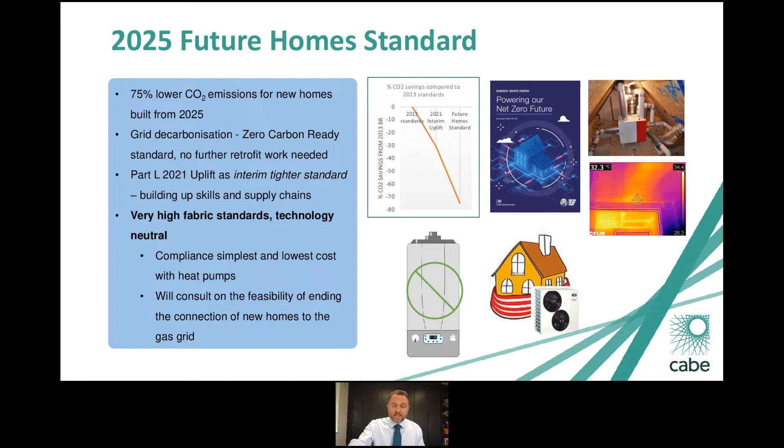So hopefully it gives you a flavour of it. It's a very significant step in the right direction, but the big headline will be no gas. So the proposal is 2025, you cannot connect gas to your new homes. Because it's a big change, there's going to be an interim step. So very quickly, there will be an interim step which we hope to come into law late this year. And that is a proposal for a 31% shift in carbon, so approximately halfway to the Future Homes Standard for 2025. Again, it's a fabric first approach, but with a bit more flexibility.

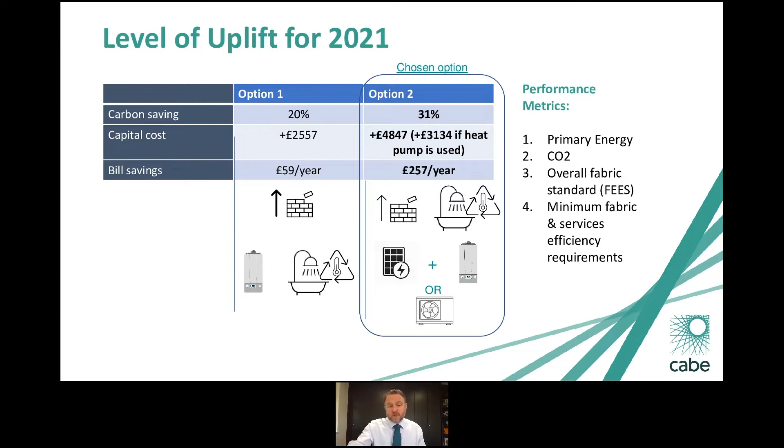You can still use gas, but if you're still using a gas boiler, you do have to put the measures in place so that the building can easily be switched over to a zero carbon source later. So for example, if you're using gas boilers, you'd need to put low temperature radiators in. That gives you a bit of efficiency advantage now, but also makes the switch over to heat pumps later on easy. There is some cost to this, somewhere between £3,000 and £5,000 is the estimate per unit on average, depending what technology you get there. And there's a lot of focus on heat pumps because that seems to be the cheapest and most cost-effective way forward with technologies that are currently available today. So good fabric and heat pumps are clearly going to be a big part of this transition.

Very quickly, because this is just a brief introduction, we are looking at a number of other key issues. So one is the performance gap. So this is something many of us in the industry have been talking about for some considerable time, where homes just aren't performing at the level that they're supposed to through issues around design, construction.

It's very complicated, and these regulations are going to start to address that. The first step will be in 2021, with a big push around transparency and provision of information through to the end users so that things can be fixed, and we can find out why things have gone wrong later.

With a bigger push in 2025, possibly with new technology looking at actually measuring the performance of homes in use after they are built. And then final thing from me, if you're a house builder designing the room, get ready, because this is going to start happening quite quickly.

2025 isn't very far away, but also the way the regulations will be implemented, the transitional arrangements are changing so that no longer will you be able to get approval for a particular set of regulations on the entire site. It will now be building by building. So if you haven't started construction on the individual home within 12 months, you will have to switch to the new standard. That's definitely one to manage if you're involved in the provision of housing at this time.

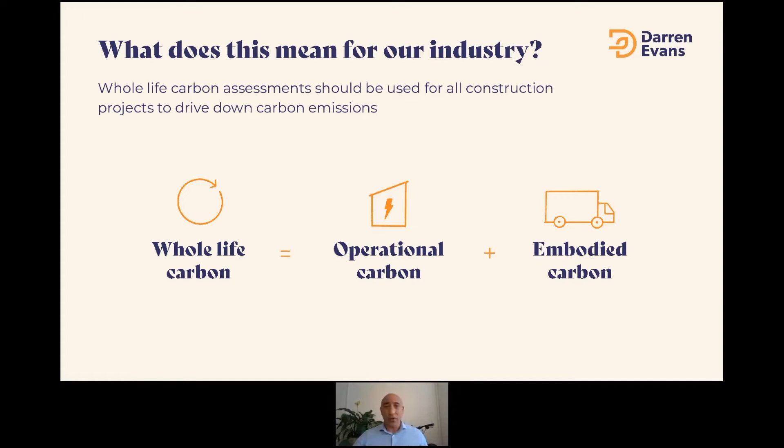So just to firstly cover the operational, I think that there's mostly architects on this webinar, and I'm sure you'll be very familiar with the regulated emissions, which you'll see in your SAP and your SBEM calculations for building control mostly. This covers things that the government wants to control: heating, hot water, electricity.

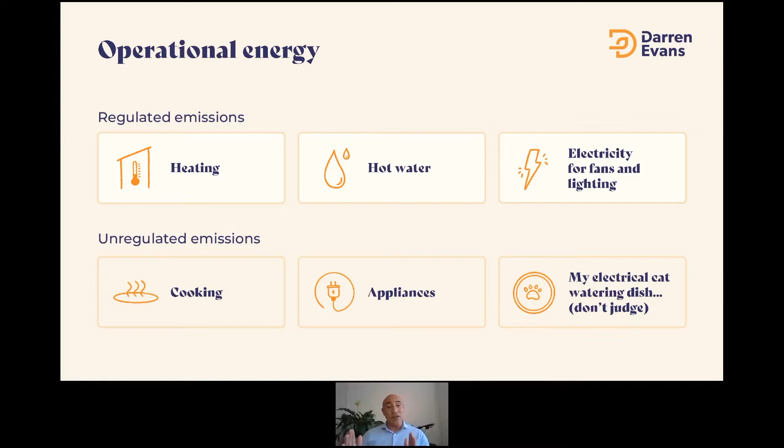Now, the unregulated emissions are things that the government don't control. They don't control how many TVs I have in my home. They don't even control if I want to be a little bit geeky and get some automatic water feeder for my cat. They've got no control over that at all. And so it's important to understand and realize that we need to split these 2 out, because they both feed into the overall issue.

When we look at the way that emissions are addressed within the building, first of all - and this has been taught and preached and applied in most places for a long time - we first need to look at, as Gavin mentioned, fabric performance. Then we start to go into areas that are slightly variable with how we deal with heat into the space and also heat into hot water.

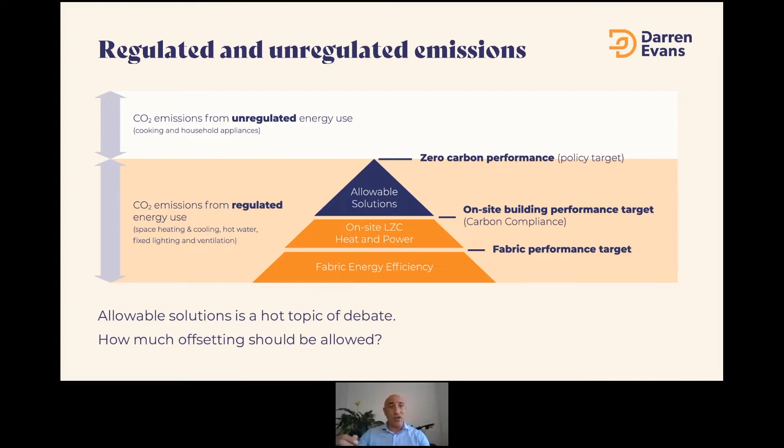Above that, once we want to get into this higher or better area of how we address carbon, not just within the country but across the globe, is how do we address and what do we do to look at this unregulated energy piece.

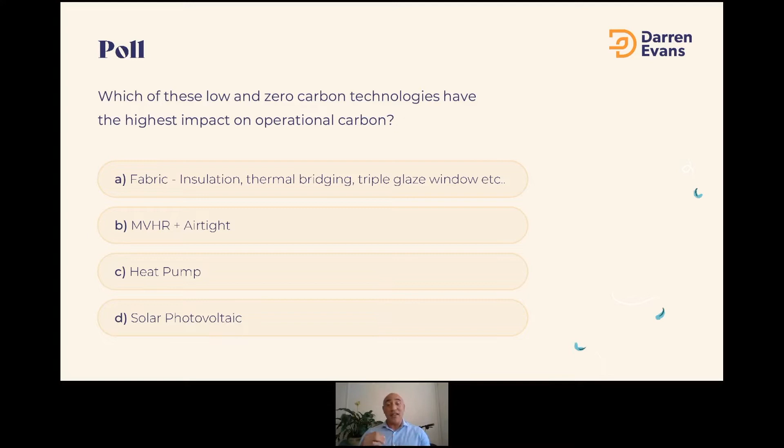Now generally, the thing that makes the biggest difference is heat pumps. Yes, they are unsightly, maybe for some on the back of the house. And yes, we could be in a position like we were in Northern Ireland, where we didn't look at the fabric and all we did was put heat pumps in because of other incentives, and things went terribly wrong. But assuming the fabric is of a good level or a high enough quality, the thing that would make the most difference really is a heat pump.

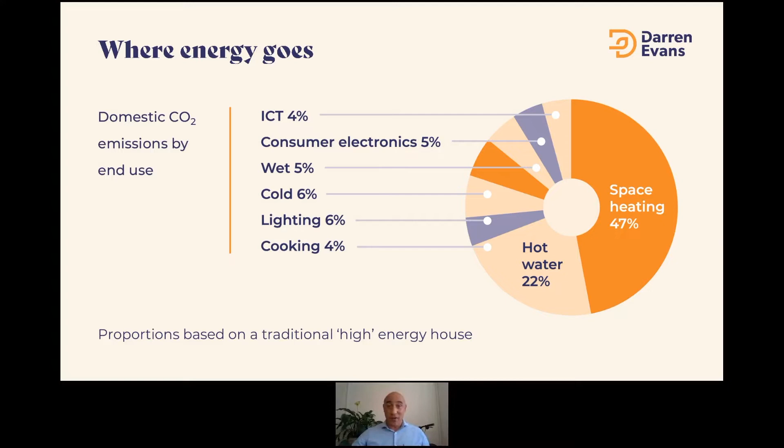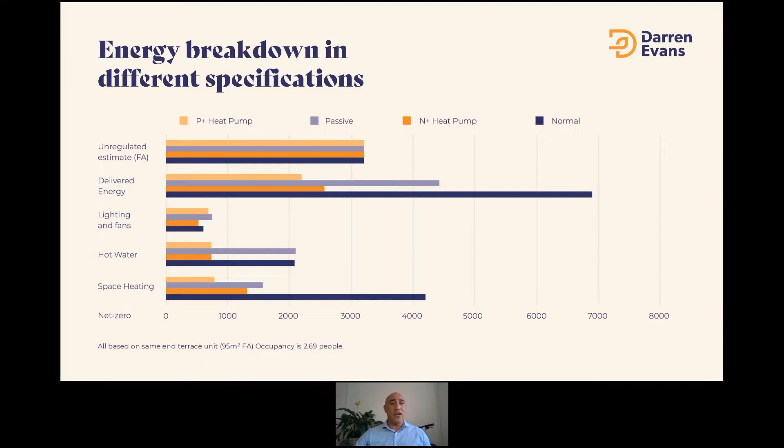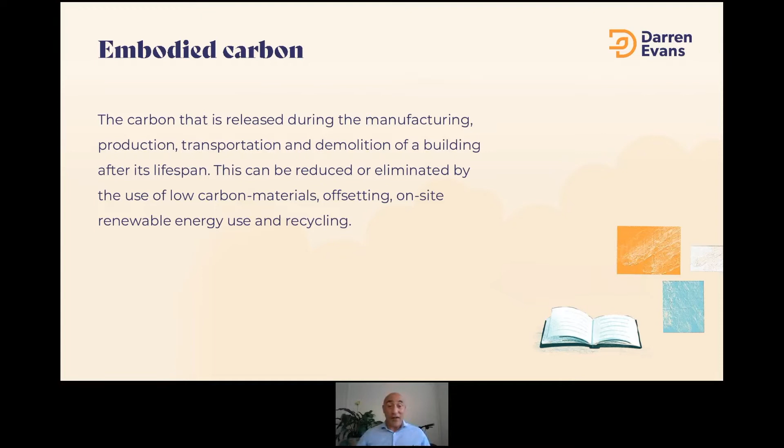So as this is just a very quick illustration, I want to press on and look at the definition of the other element, which is embodied carbon. Embodied carbon is something which is becoming more and more prevalent now. There was a news piece just on the BBC today with reference to demolition, and a concern about how that affects the embodied carbon within that demolition process being released.

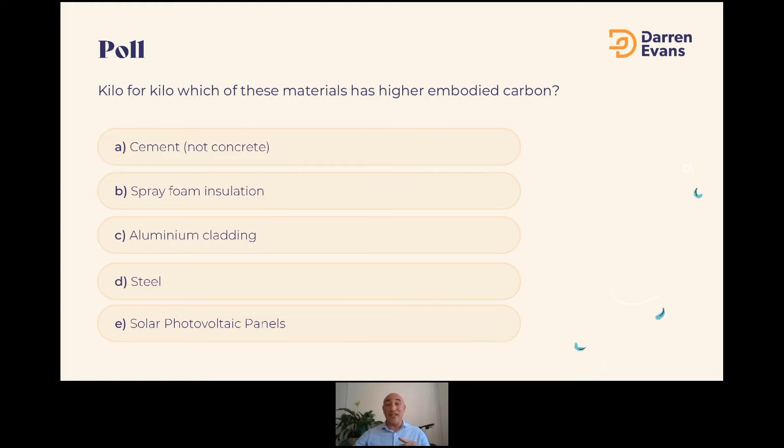The one that is the worst, without doubt, is aluminium cladding. There is no benefit in using aluminium cladding when we look at the environment for aesthetics. I appreciate that aluminium is used in other areas for other reasons, but when you're looking at aesthetics, if you're using aluminium cladding, you really are making a poor choice there.

So 5 quick takeaways there, I will just leave for you because my time is really short. First one, if you don't need to build it, please don't build it, because that is the best and most important way of reducing the impact of carbon on the environment. Second one, with reference to aluminium, don't just use it for aesthetics. It needs to be far more purposeful than just the aesthetics.

Reduce the amount of concrete used in foundations. I see in the poll lots of people believe that was the greatest emitter. Yes, a considerable amount of CO2 is released. There is a new technology called LC3. Some of you may or may not know about that, but what that's looking at is the reaction of the chemicals coming together and how those chemicals actually reduce the amount of CO2 that's emitted in the atmosphere.

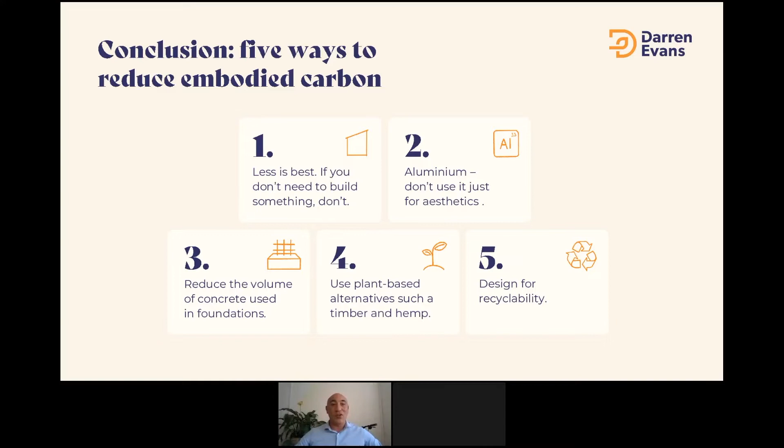We know about plant-based, but I guess the overall way to start to reduce things is to design and plan initially for things to be reused later, so that we can keep that carbon locked in that house. That is it for this whistle stop tour, but thanks very much for your time, and back to you, Ruth.

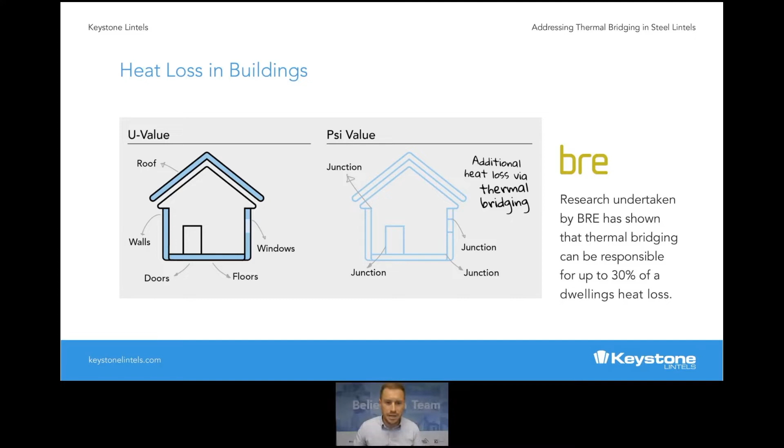I'm sure everyone's aware of it or heard of it. The BRE actually did some work into thermal bridging several years ago, and they found that up to 30% of a typical dwelling's heat loss can be through thermal bridging alone. So it's quite a significant amount. So what is thermal bridging?

Well, in simple terms, it's anywhere in the building where there's a more conductive material or maybe a gap in the insulation in that external fabric or the external envelope that really forms a bridge between the warm inside and the cold outside and provides a clear path for the heat to escape and be wasted. So thermal bridges fall into really two categories, non-repeating and repeating.

So the repeating thermal bridges are any material that really interrupts the insulation layer in a really consistent and predictable way. So if we think about steel wall ties in traditional build or timber studs like we're shown here in timber frame, they're all taken account for in the overall U value for that particular element that they sit within. And it's the non-repeating thermal bridges that really have to be addressed separately. So things like where building elements meet, so where the wall might meet the roof or the floor.

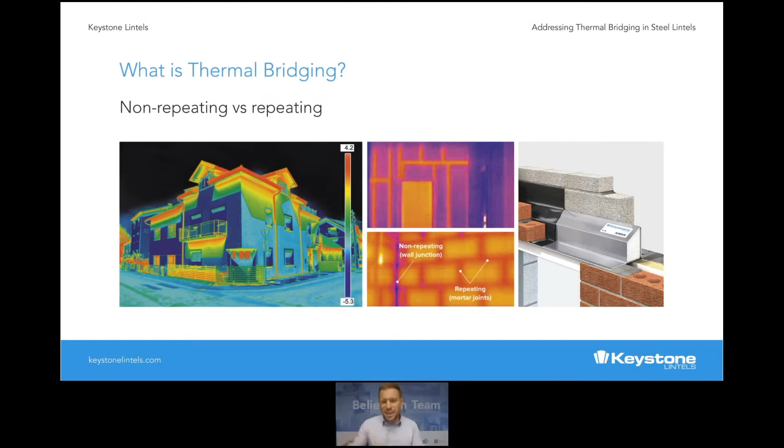And I know we're maybe a bit biased being a lintel company, but the lintel example we've got here is actually a really good example of a thermal bridge because it bridges the cavity and it acts as a clear path for the heat to escape, because number one, steel is naturally highly conductive and lintels generally span over long lengths. So for that reason, that tends to be why they're one of the worst thermal bridges within the builds, or one of the key ones really to look at and address.

So the primary function of a steel lintel is obviously structural, and in doing so, it's acting as a thermal bridge, and we can see that in this thermal image of a typical house here. And when we talk about thermal bridging in SAP calculations, we're really looking to improve the construction around these details to really stop or eliminate the heat escaping and therefore save energy.

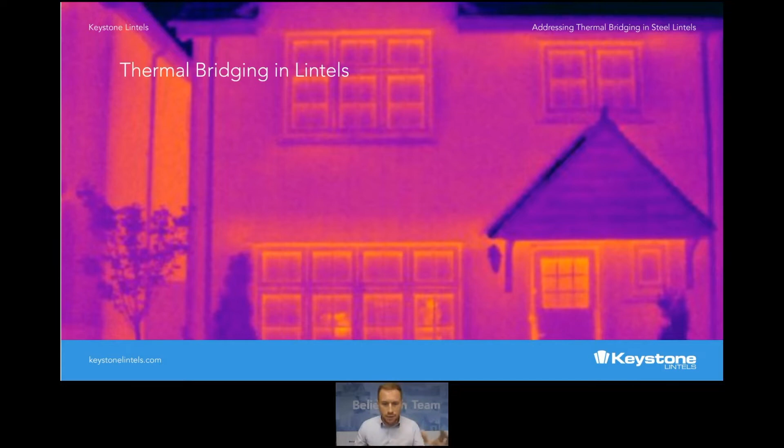So those, I know we're limited on time, but they're really the simple principles of Fabric First and addressing thermal bridging. So we're sticking with the lintel junction within SAP. One way to virtually eliminate the thermal bridging would be to specify a Hi-Therm style lintel. So this is something we have developed in the world of lintels to really eliminate that thermal bridge in steel.

So Hi-Therm lintels work in the same way as standard steel with one major difference, and that you can see we've introduced a second material. So this is a rigid polymer isolator that isolates the two leaves of galvanized steel and creates a really powerful thermal break. And as you can see, it really stops that heat from bypassing the insulation layer and really eliminates that key thermal bridge within the building.

So some of the key benefits of the actual lintel are it's installed in the exact same way as a standard one. When we designed it, we really wanted a smooth transition for site teams and installers. So it's installed in the same way. It's been designed and tested to support the same loads as a standard one, so same length, same structural capacity, same cavity sizes, and crucially, it's around 5 times more thermally efficient than a standard.

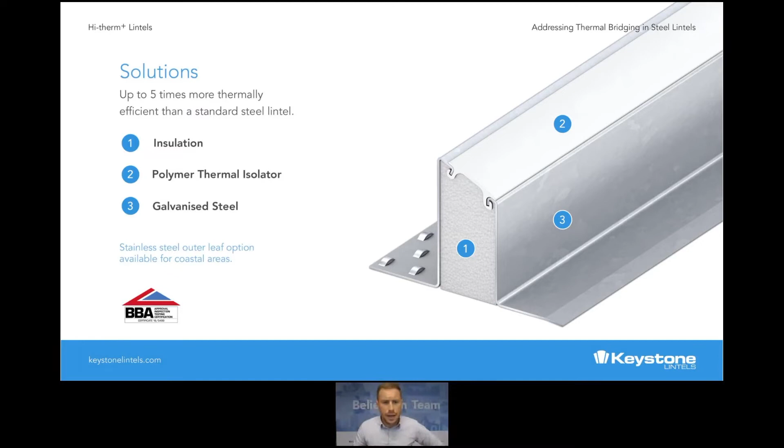And I'll come on shortly to Psi values and why they're important and what difference they can make in SAP. But typically the Hi-therm is around 5 times more thermally efficient, and also it's been fully BBA tested as well. So just looking at the Psi values, these are what makes all the difference within SAP calculations, and this table shows what values are available for steel lintels.

And to really design efficiently in Part L, it's really important today to use independently calculated Psi values by trained people. So people like Darren and his team, manufacturers will do bespoke accurate Psi values now, and you're always going to get the best result in your calculations if you're using accurate values. So the default value is 1 for steel lintels. I'm really hoping no one's using 1 because it has a really detrimental effect.

And the standard Psi value for usual steel lintels is 0.23. There are some accredited construction details for steel lintels. They're actually being removed from the next round of SAP because today, even they're outdated, and calculated values are significantly better.

Yeah, they're being removed from the next round of SAP as well. And with the Hi-therm, you can see we can get it as low as 0.03. So you can see it's significantly different, lower, and that's what can make all the difference within SAP. So really poorly performing products and materials are increasingly penalised.

So if you don't address these details, and I'm showing you the lintel junction, but there's lots of other junctions, really looking at the details and really trying to improve them, it's going to go a really long way to help you reduce your build costs and not spending extra money elsewhere in the spec unnecessarily.

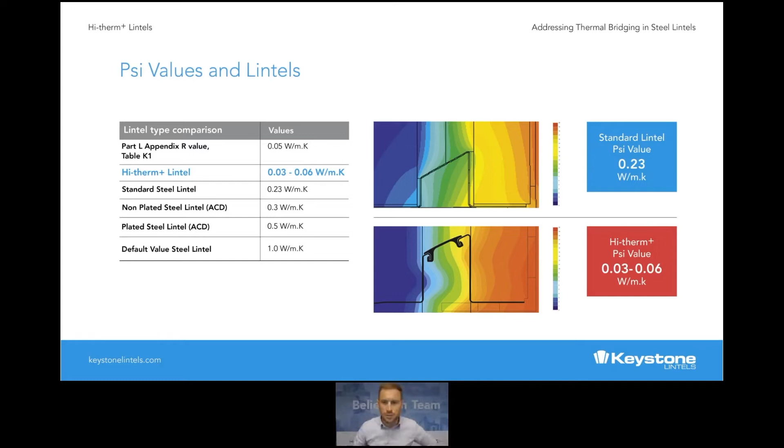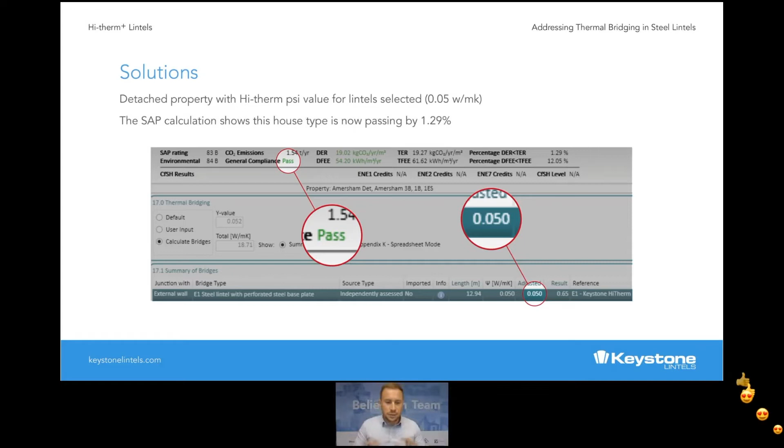And we just wanted to highlight what difference Psi values make. So by putting in the Hi-therm of 0.05 without changing anything else, we can see that now this house type is passing. So we just wanted to highlight, look at the detail. These little details collectively, they can add up to quite a significant amount.

And just to remain impartial, obviously to eliminate the thermal bridging problem, you could go back to the old way of doing things, which is really to use 2 separate lintels, which, as I said, ticks the thermal bridging problem, but it does come with a number of buildability issues, which is another key thing because there's a number of knock-on effects to doing this.

Additional materials required, so cavity closers, propping would be required for single leaf lintels such as that during installation, which is another cost in the process. Extra work for the guys because they're double handling, cutting insulation, and so a lot more knock-on effects to specifying that, to think about. And when you compare it to traditional Hi-therm lintels, a lot of the time it becomes more cost effective anyway, once you've added in all the additional things.

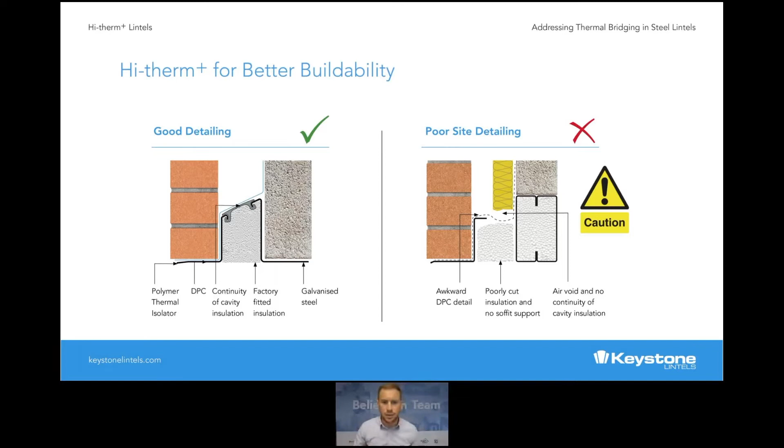Because we are now moving on to our Q&A session. That was absolutely great, Ben. Thank you. And I think it's so important that we understand that we have to have all the theory right, but actually we have to get all the details of the building right.